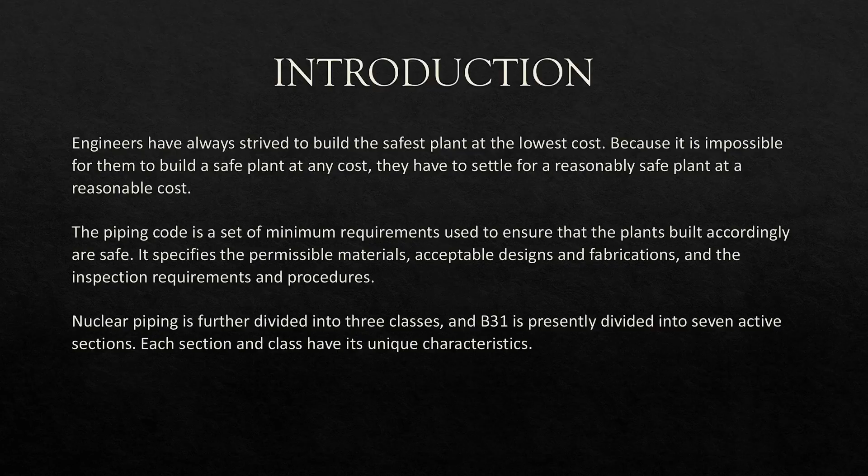For the non-nuclear piping codes, I have selected the main piping codes that we are mainly using in our stress analysis. These piping codes are B31.1 for power piping,

B31.3 for process piping, B31.4 for pipeline transmission of liquid hydrocarbons, and B31.8 for gas distribution, which covers pipelines which carry gas.

B31.1 is used for the design of power plants, and since a power plant is an important facility which cannot fail or shut down, the factor of safety of this code is considered high, if we compare it, for example, with B31.3. B31.3, from its name, is used for the design of petrochemical plants.

B31.1 and B31.3 have nearly the same design equation, except the difference comes with the allowable stress used in each code. We also have B31.4 for cross-country petroleum pipelines running mainly through unpopulated areas.

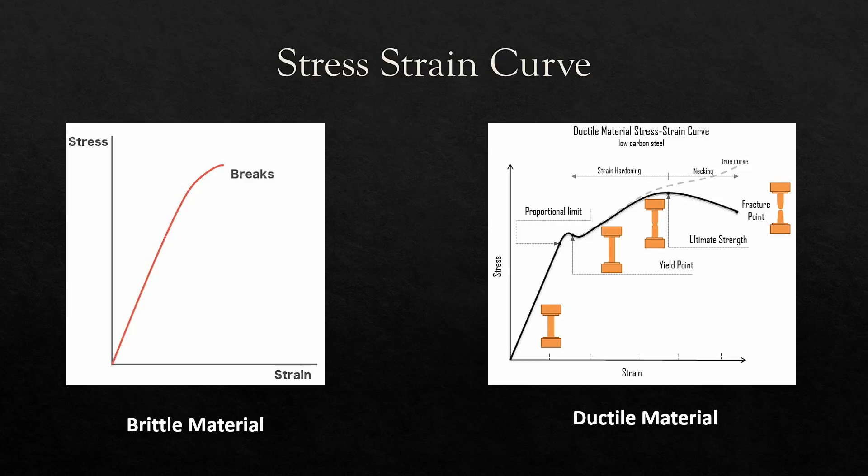But what about the more complex case of triaxial stress? How can we predict the failure? It's very difficult to predict the failure. Here comes the importance of the material failure theory. The failure theories simply allow us to predict failure of the material by comparing the stress status in the object with material properties that are easy to determine, like the yield or ultimate strength of the material that we can obtain by performing a uniaxial stress test.

The maximum stress theory, which is the Rankine theory, maximum strain theory, the maximum shear theory, which is Tresca theory, maximum energy theory, maximum distortion energy theory, von Mises. Usually in stress analysis, we have these three theories that we care about: the maximum principal stress theory, which is the Rankine theory, the maximum shear theory, which is Tresca theory, and the maximum distortion energy theory, which is the von Mises theory.

We can use the yield surface for these three theories to compare between them. Rankine theory states that the material will fail if one of these stresses reaches the yield strength of the material. And if we try to plot it, it will come as a square connecting the yield strength points of the material. Sorry if the square is not very clear, I'm trying to do it with the mouse. Let's consider this a square, and this will show the range for the principal stress theory, which is the Rankine theory.

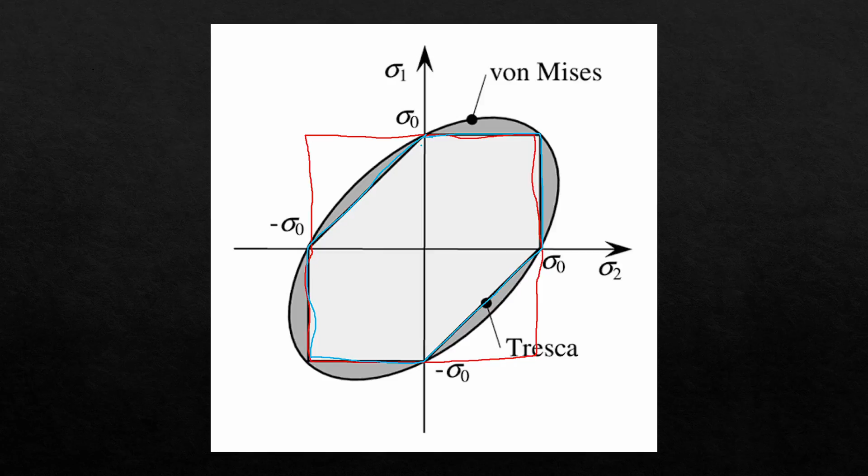While if we are talking about the Tresca theory, the Tresca theory states that yield occurs when the difference between the maximum and the minimum principal stress is equal to the yield strength of the material. If we try to plot it, you will find out that the range of the plot will be this blue line. And this is the representation in the yield surface for the Tresca theory.

While if we try to plot the von Mises theory, you will find out that the equation will give you an elliptic equation that can be drawn with this ellipse.

As you can see, the maximum principal theory, while it's easy, is not a conservative theory, because all of this is outer range. So when we make our studies, we depend on the Tresca and the von Mises theory. Both of them agree well with the experimental observations.

Although von Mises agrees slightly better, the Tresca yield surface lies entirely inside the von Mises surface, meaning that Tresca is more conservative. And this is why the ASME is adopting the Tresca theory in its calculation, while von Mises is usually adopted by the finite element analysis because it's dependent on energy, so it's easy to be shown in contours.

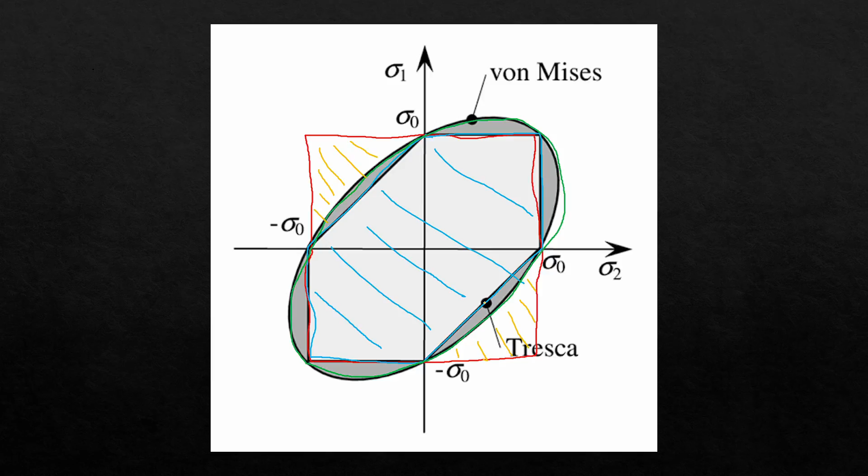Since we are talking about failure theories, we need to know first what are the loads that are applied on the pipe, or that the pipe will face while it's under operation. First of all, let's consider a piece of pipe and check what loads it sees in operation. First of all, it will see the longitudinal stresses with the bending moments. Also, it will see the torsional load, which creates a shear stress.

And because of the internal pressure inside the pipe, it will see the hoop stress and radial stresses, which are considered from the outside and the inside pressure on the pipe. So we have the longitudinal stress, which is the force per cross-section area and the bending moment per the section modulus, and hoop stresses, which are considered to be very low and negligible since we are studying the thermal strain inside the pipe.

The radial stress will be equal to 0 because we are not studying any dead weights. We are studying the thermal stress that affects the pipe, so we will consider it equal to 0. And the shear stress, which is the shear divided by the section modulus.

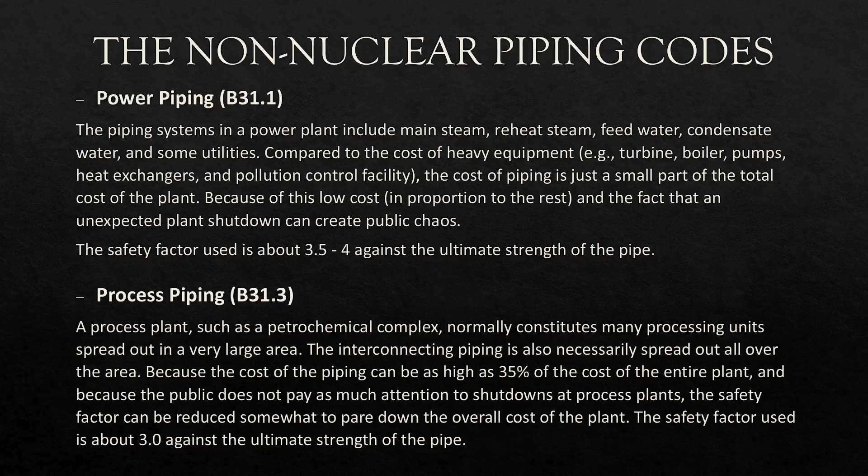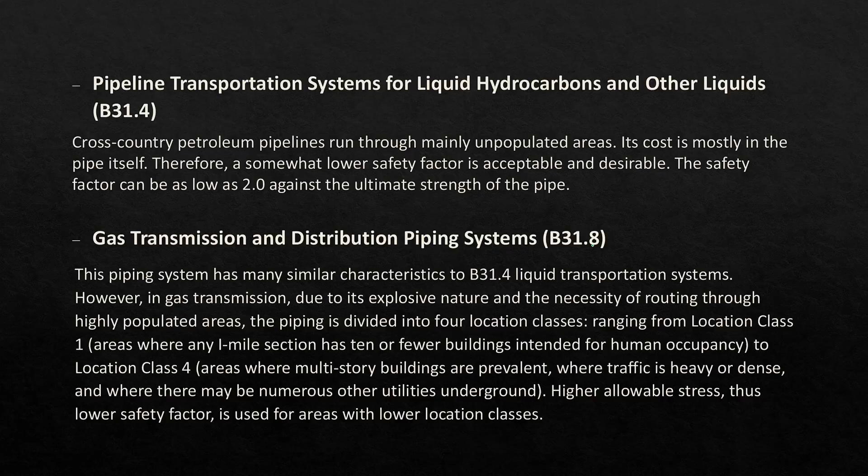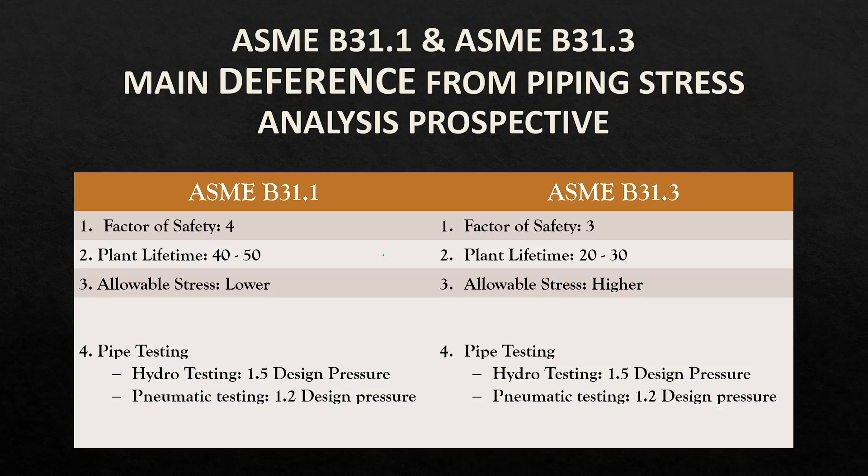This is the end of my presentation. Let me summarize. We talked about the codes and gave a brief history of the code. We talked about the main four codes that are commonly used for piping stress analysis: B31.1, B31.3, B31.4, and B31.8. We made a brief comparison between B31.1 and B31.3: the factor of safety in B31.1 is equal to 4, which is higher than B31.3, which is equal to 3. And the lifetime in B31.1 is 40 to 50 years, while the lifetime in B31.3 is 20 to 30 years.

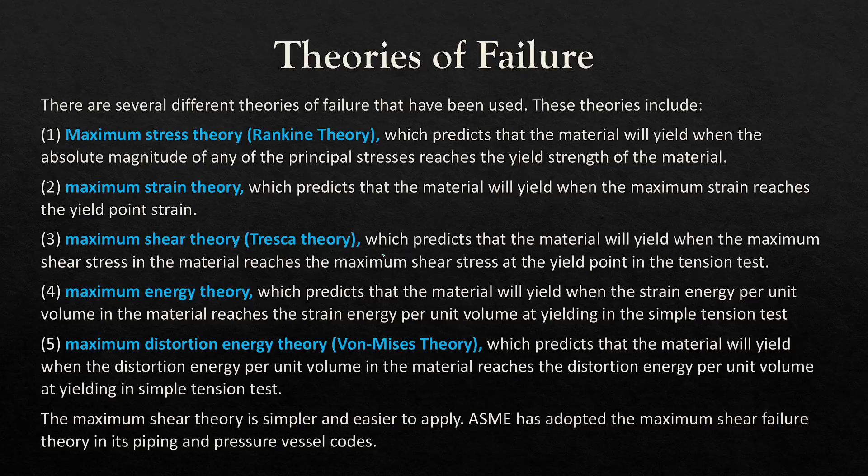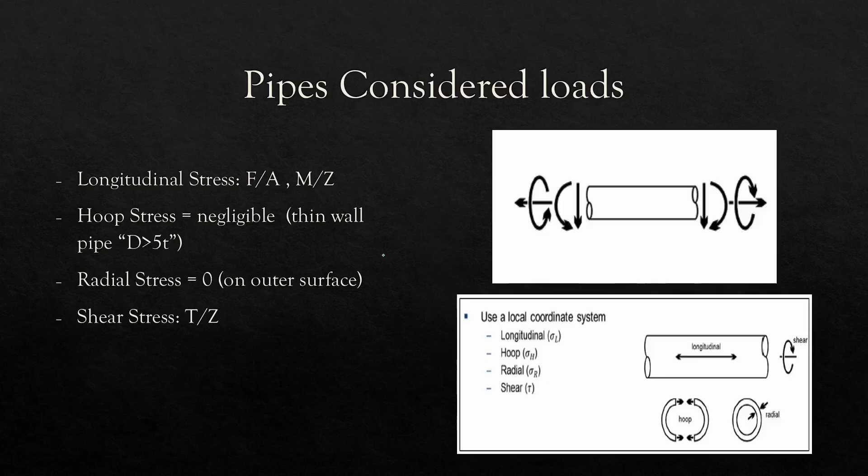Also, we talked about failure theories, and we said that we have three failure theories used for ductile materials: the maximum principal stress theory, the maximum shear theory, and the maximum distortion energy theory. The code adopts the maximum shear theory, since it's more conservative. The maximum distortion energy theory is the one mostly adopted by finite element analysis, since it deals with energy and can be represented in contours. We also talked about the loads applied on the pipes, and we went deep into the shear stress theory, explaining the Mohr circle and how we extract the equation of the maximum shear theory.